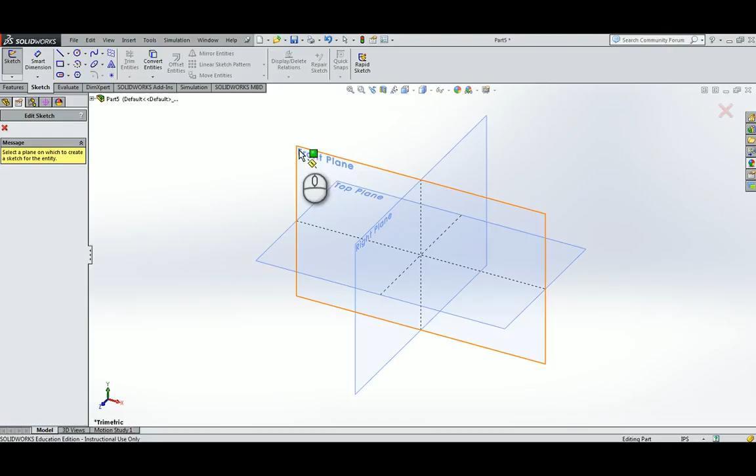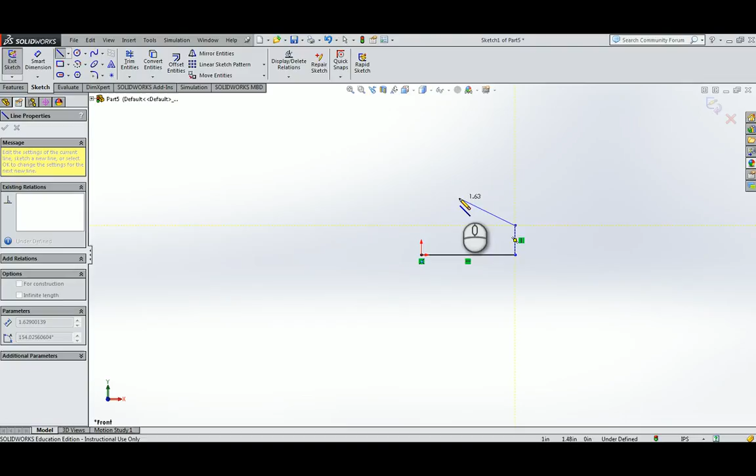So we hit OK. We're going to make a new sketch on the front plane. I'm going to draw a line from the origin to the right. Let's redo that. From the origin, straight to the right, straight up, at an angle, straight up, over to line up with that bottom one, and back down to the bottom one.

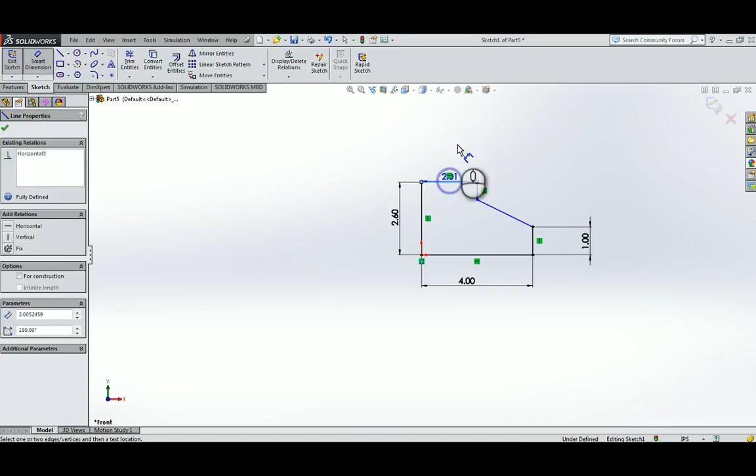We have that sketch done, let's put some dimensions on it. This dimension is 2.6, this one is 4, this one is 1, and 0.25. We don't need to worry about this dimension or this angle.

Finish the sketch. Hit the space bar. Go to this orientation palette. Hit isometric.

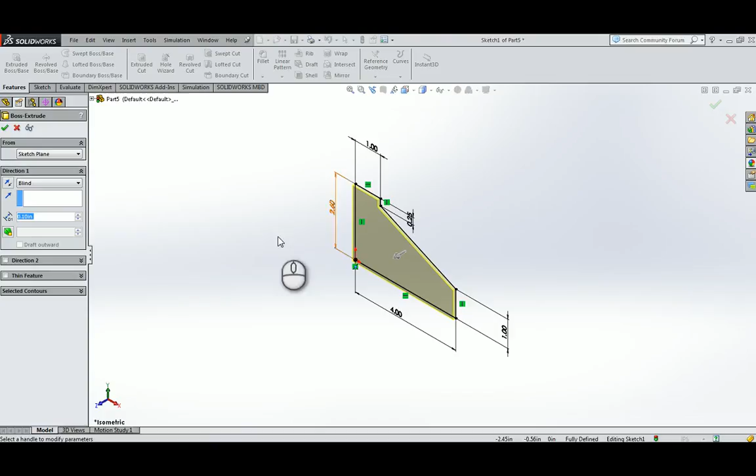Features, extrude. Automatically select it. We're going to change it to 2.5 for the extrude depth. We're going to go mid-plane to offset at both sides of the origin. And we hit the check mark there.

So the next thing we're going to do is create a three-dimensional sketch. It's not something we did in Inventor, but we are going to do it here. 3D sketch, click line. We're going to start at this point.

Go to some random point over here, straight up to this line, and then we're going to go to this line, and then back to the origin. We're going to click OK to set that three-dimensional sketch.

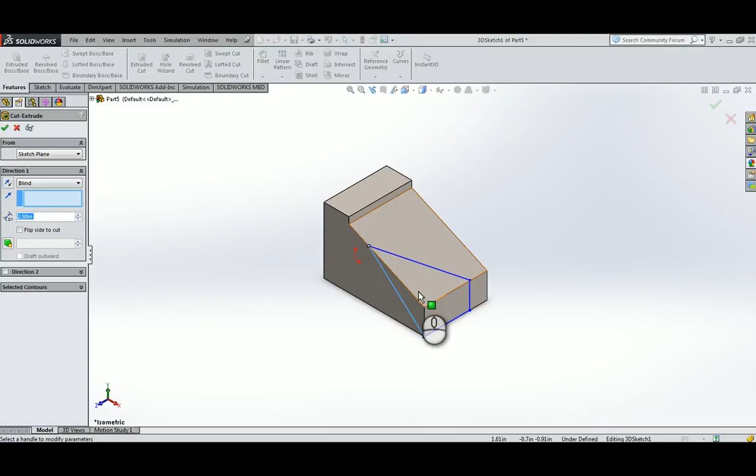Now we're going to go back to features, extruded cut, and blind is our default condition. We're going to select the top face here to be removed.

It didn't work, so we'll try to find out why it didn't work. Extruded cut, top face, blind, check mark.

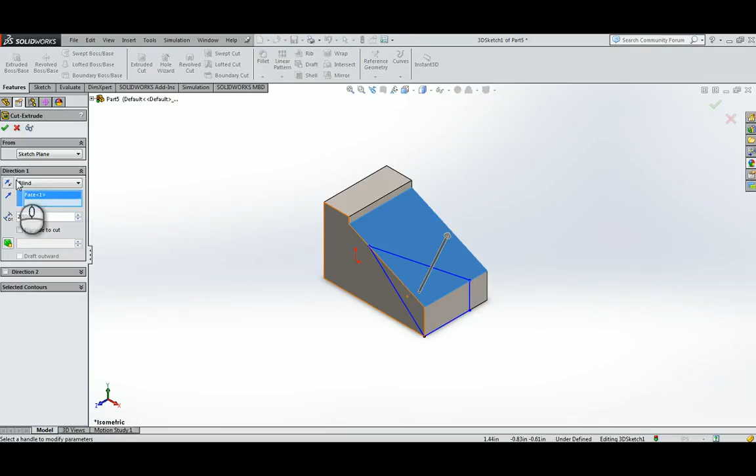So the reason it didn't work is because my 3D sketch was not actually in the right spot. So we're going to try it again, and if it doesn't work this time, I'll show you what the mistake was, and we'll try to solve it.

So we're going to click line. We're going to select this. Let's select a point on this line. Select. Why is it not selecting the line? 3D sketch, line. That's why it wasn't.

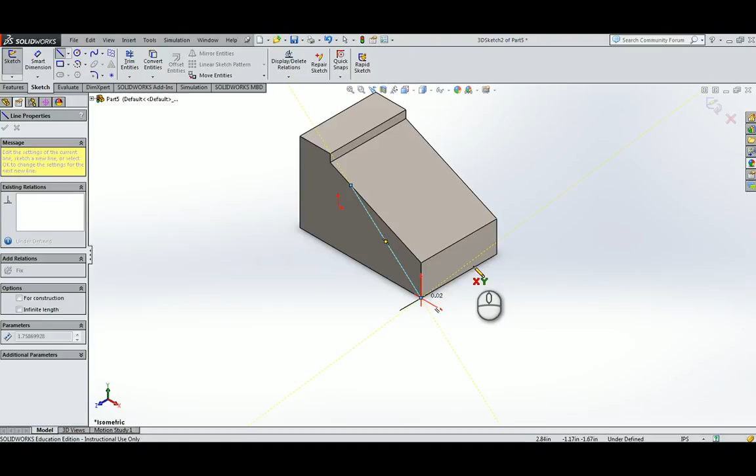This line, this point, this line, this line, and then back to this point. That looks a lot better.

So we'll finish that, and I'll show you what I was looking at. When I went to the front view, the sketch was way out here somewhere.

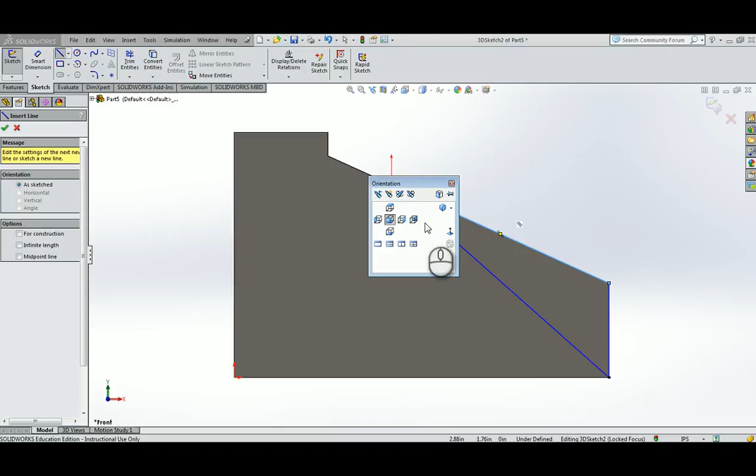If I go to the right view, you can see that it's touching there. It should work this time. Spacebar back to this view.

So let's put some dimensions on here. From this point to this point, it's going to be 0.5, and this point to this point is 1.5. Okay, so finish those dimensions.

We should be able to go to features, extrude cut. It should automatically select that. This is the part we want to go away. Click this top face here and click OK. That's what the part was supposed to look like.

So at this point, we are going to look at the overall mass of the part. So we're going to evaluate mass properties, and...

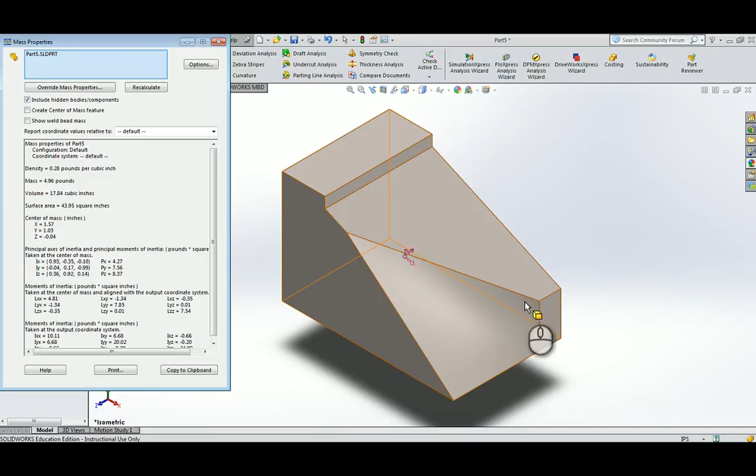It's not going to be right because my sketch was wrong. My sketch was supposed to come across here. So let's go back and undo that and build that sketch again.

Okay, so 3D sketch, line, here, to here, to here, to here. Finish the sketch. Dimension, this point to this point is 1.5.

And this point to this point is 0.5. Finish the dimensions, features, extrude and cut straight up off of this surface. Okay, that's what it's supposed to look like.

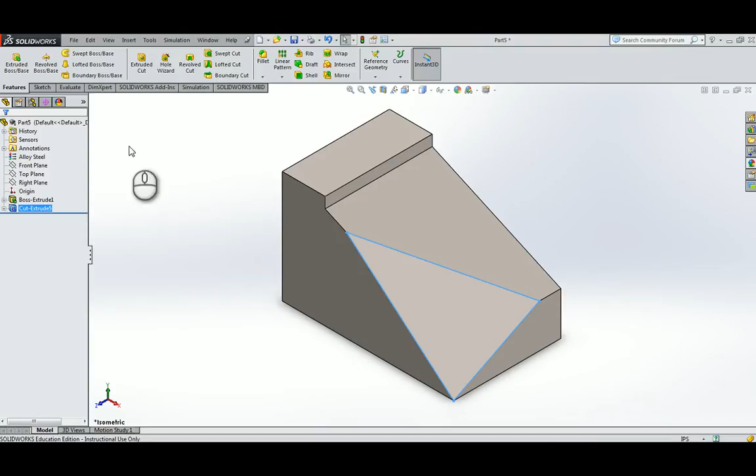So from here we're going to go to evaluate mass properties. The overall mass in the book says 4.97 pounds. I'm at 5.07, so I guess I'm pretty close. Hopefully you're closer. The X is 1.63, I have 1.61, the Y is 1.01, I have 1.02, and the Z is negative 0.04, I'm at negative 0.03.

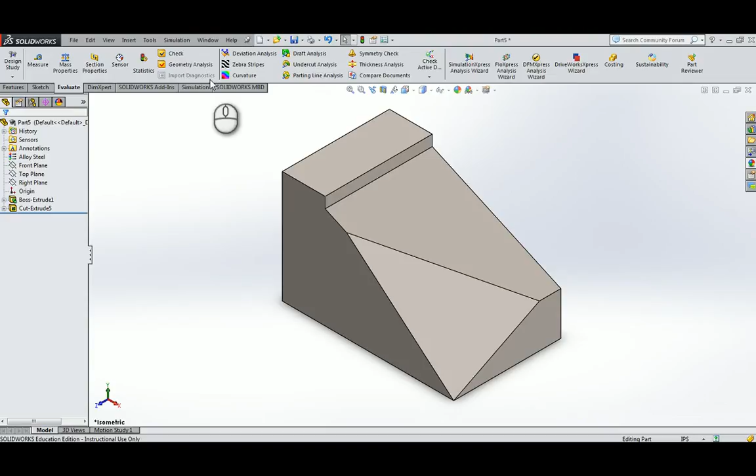So with this part, we're going to close these options, file, save as, we're going to call it mass-volume 2-1, and save it wherever you're saving your parts.

Sorry about the mistakes along the way, a learning experience for all of us. So at this point we're going to close the model.